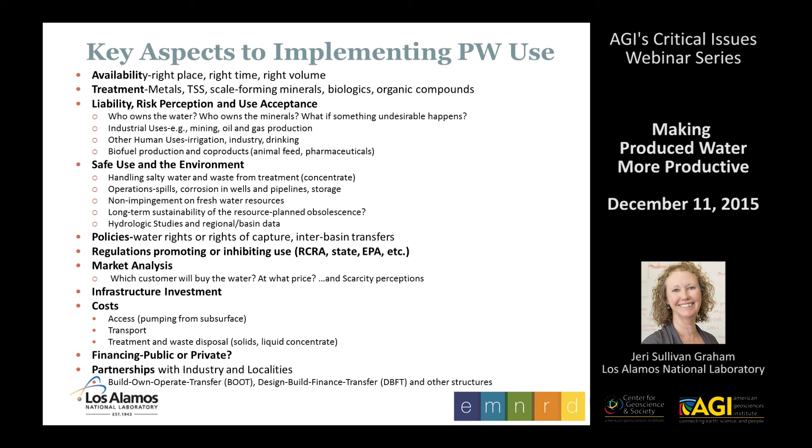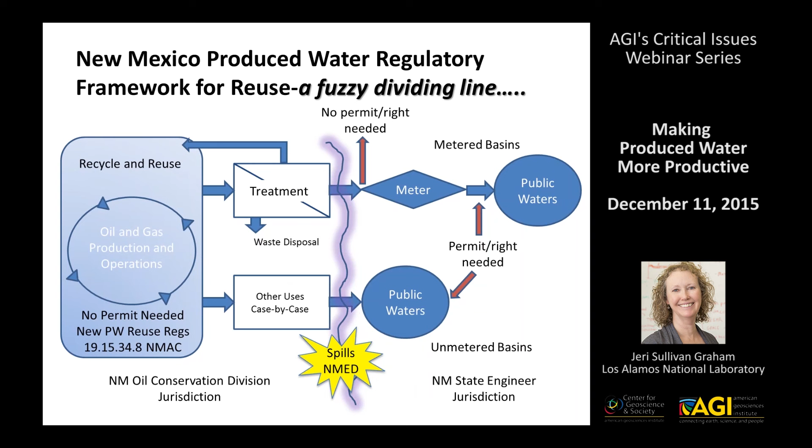However, once we treat this water or move it over into the freshwater regime, which is governed by our state engineer, then we start looking at a completely different regulatory system. We have water rights and water permits that are important. And of course, if there's a spill, our environment department takes over and has jurisdiction there. And again, the liability issue comes into question. So there's a lot of things along that fuzzy dividing line down the middle that will need to be looked at and better defined so that we can use these waters.

Some alternative uses for produced water. As I mentioned, reuse in oil and gas production is a really logical place for produced water to be used. There's a clear regulatory pathway. Hydraulic fracturing is reusing produced water quite a bit right now. And there's also some other examples. I'll bring up one about steam flooding that's being done in California and some of the oil fields there.

Irrigation is one that's always brought up. I hear this all the time. After treatment or dilution, irrigation is a potential use for produced water. I will show an example of rangeland rehabilitation, some work that was done at Los Alamos and Sandia with some small businesses several years ago in northern New Mexico. And then, of course, the most recent study on growing a non-food crop, which is cotton. Algal biofuel production is something we've looked at as well. This is an interesting and somewhat new way to look at using produced water. It's like a new energy versus old energy.

And then another example might be potash mining. This has been proposed but is not yet enacted in New Mexico. However, I'll note that solution mining using saline water is a very good way to extract potash. Right now they're using brackish water. The alternative would be that they would use fresh water with added salt. And so we prefer that they use water that's already salty rather than taking up fresh water. So it's a potential good use of produced water if we can get the quality issues resolved.

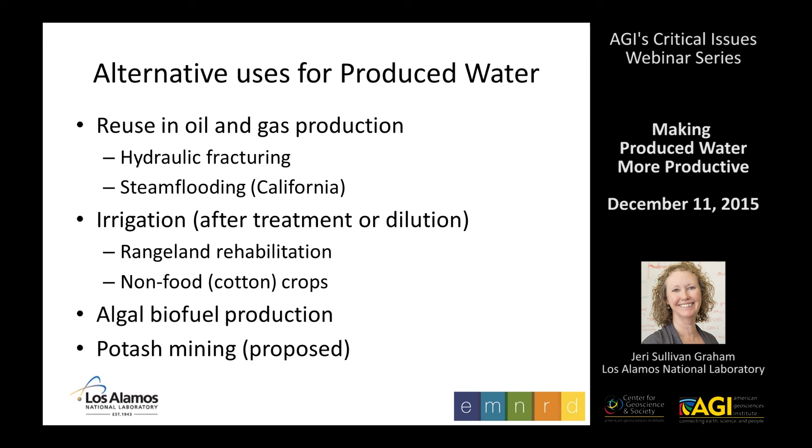For hydraulic fracturing, there are a number of reuse criteria that are important. They may not always be what you think would be important. Of course, some of the critical treatments would include removal of solids, total suspended solids, free and colloidal oil. Microbe removal is very important. Uncontrolled microbial growth in wells can cause corrosion and clogging and other problems. Iron and floc formers is very important. Need to get the iron out.

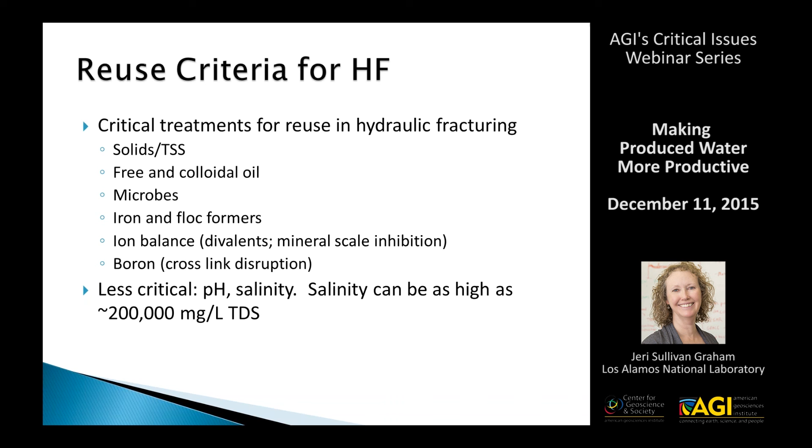Ion balance is also important both for formation interactions and mineral scale inhibition. And then boron is a problem for the additives they use during fracturing. Less critical is pH and salinity. Hydraulic fracturing processes now can utilize very high salinities, which is a good thing because salt removal is very expensive.

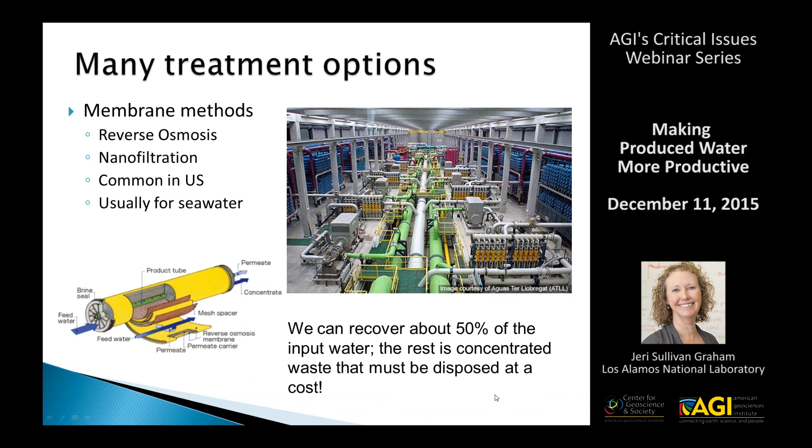There's a number of treatment options that are out there for saline waters. I won't get into this a whole lot, but bear in mind that membrane methods are usually the most common methods we know of. They are usually used for seawater. That's the type of desalination that we know the best. Always bear in mind that there is a concentrated waste that must be disposed at a cost when you do a separations process like a membrane method or a thermal method. You will have some fresher water, but you also will have a waste. And so when you're inland, that means injection for disposal or perhaps evaporation ponds.

Thermal methods are starting to be used more frequently. This is just a fancy way of boiling water, essentially, making sure that we control the heat and the thermal processes. Solar thermal is something that's also a potential new way for separating fresh water from saline water, and it is being used for produced water. Again, you also have a concentrated waste that you're going to need to dispose ultimately.

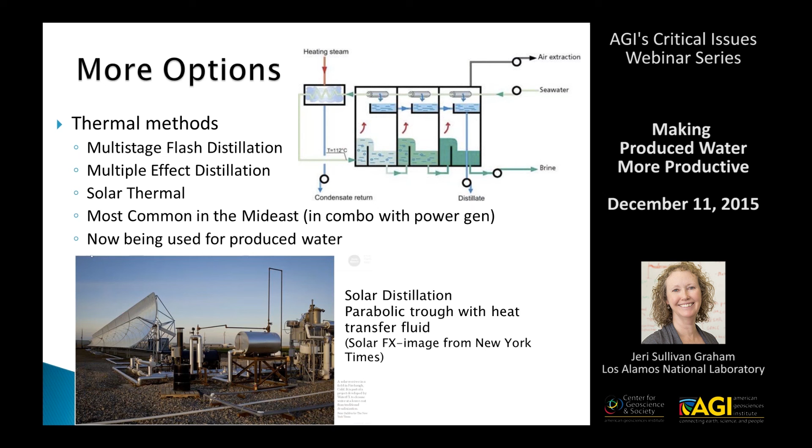And then there are some hybrid methods, membrane distillation and low temperature thermal distillation. Some of these have some improving cost profiles, which is a good thing. Also electrocoagulation and capacitive deionization are possibilities. However, they're most useful for specific constituents or lower salinities. And I could answer some more questions about these methods, but we'll keep moving along.

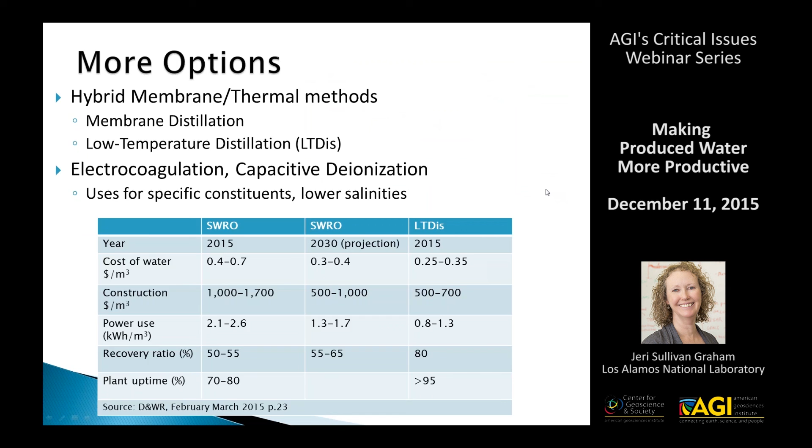I want to thank Kent Adams from Bobco. They recently did a study where they looked at the costs of freshwater consumption versus produced water consumption, both with treatment and without treatment, for a frac job. Their goal was to retain 100% of the produced water and retain the efficiency of their cross-linked gel so they could extract more gas. Fresh water has a cost, and in this case, they did not need to utilize fresh water, so that eliminated that cost of $250,000.

They decided to try some treatment. Electrocoagulation was more expensive. They also did some just basic filtration, which was less expensive. Water transport costs were where the biggest cost was incurred, as well as pumping. So those are not necessarily something you think of immediately as a key for cost, but when you look at the final bottom line, the costs are not that different, and so reuse without treatment and without using fresh water is a very feasible option.

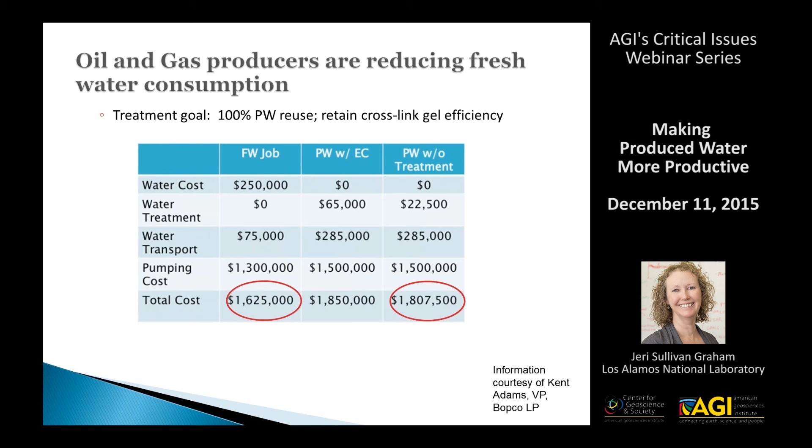Steam generation and aquifer recharge is done right now in San Ardo field in California. This is a heavy oil field. They are using reverse osmosis treatment to create water that is both discharged to basins for aquifer recharge and then for a steam generator, which has very high quality requirements. They're getting 75% recovery while reducing total dissolved solids and boron.

They have a fairly complex process with oil removal, softening, filtration, and RO. So ultimately, they're able to retrieve 50,000 barrels per day of treated water for discharge. And I've got the reference here if you're interested in looking this up. Veolia is the company that's doing the work.

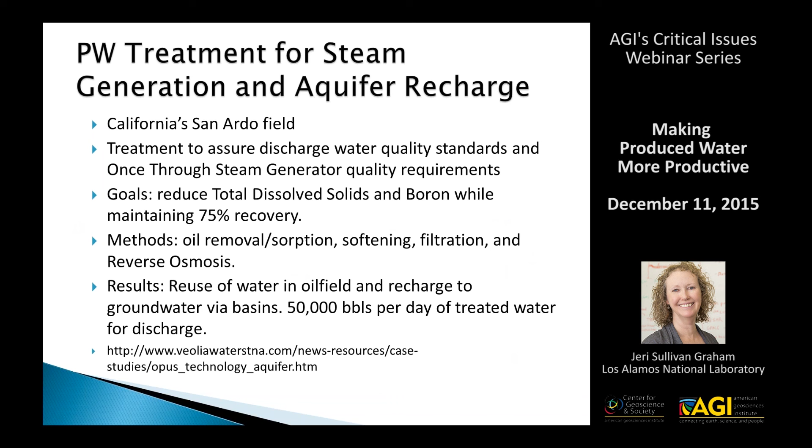The rangeland rehabilitation was work we did in Bloomfield, New Mexico. We had a coal bed methane water, not that salty. We did a number of steps. Used a modified zeolite to remove coal fines and organics, and also reduced turbidity and total iron. And this was a collaborative effort between ConocoPhillips and some small businesses, and was very successful. We had a temporary permit for rangeland rehabilitation up here.

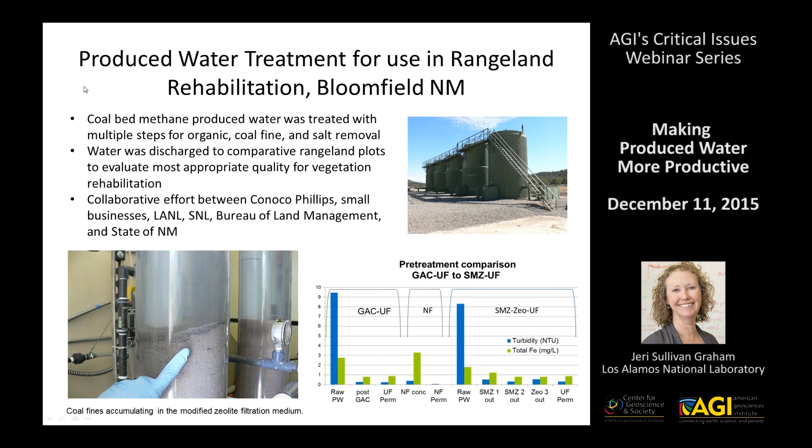Cotton production was done using produced water. Katie Lewis is the researcher at Texas AgriLife. Just finished their study, I think, at the end of November. And they used a blended water, well water and produced water. Interestingly, the treated produced water was much lower in salinity than the well water that they used at the site. The treated produced water was actually an improvement on the water quality. It reduced the salinity, and they had improved growth with blended water. So a very interesting study.

Finally, the algal biofuels. We took a look at where water needs would be for cultivation of algae. Algae for biofuels is going to need a lot of water. Fortunately, it doesn't need fresh water. So we looked at where there is very high evaporation, along with the needs for the algal biofuels. We also looked at where the oil and gas producing areas are in the gray. So the water needs are highest, of course, where the red is.

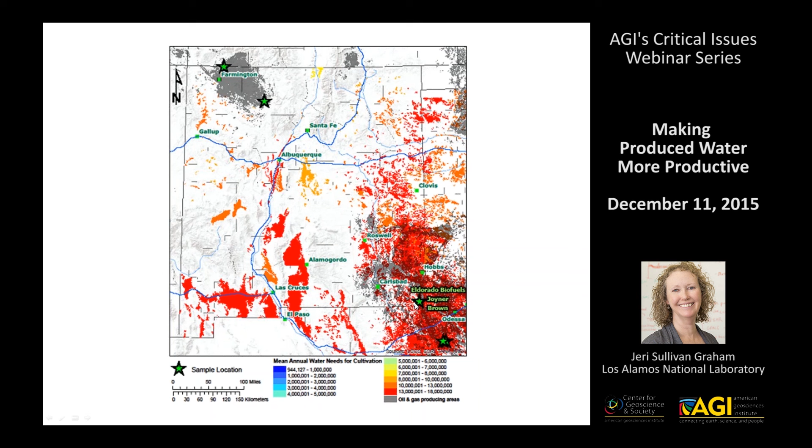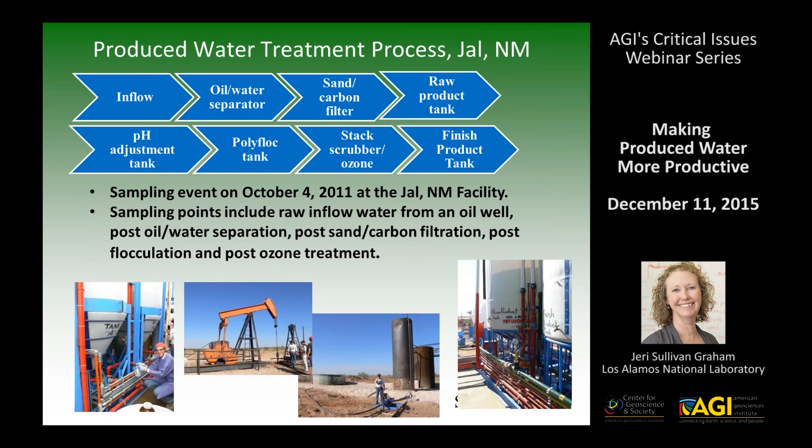We took a number of samples from different wells in different parts of the state. Ended up doing some work down in the southeast corner with the folks at Eldorado Biofuels. And what we found is that we could take produced water, we could treat it using a multi-step process. This did not need to have salt removal, but we did some organics removal and reduction using filters, oil water separator, and stack scrubbing. And ultimately, we were able to use produced water for both lab pilot and also some field scale tests, and we had good recovery of algae and biofuel.

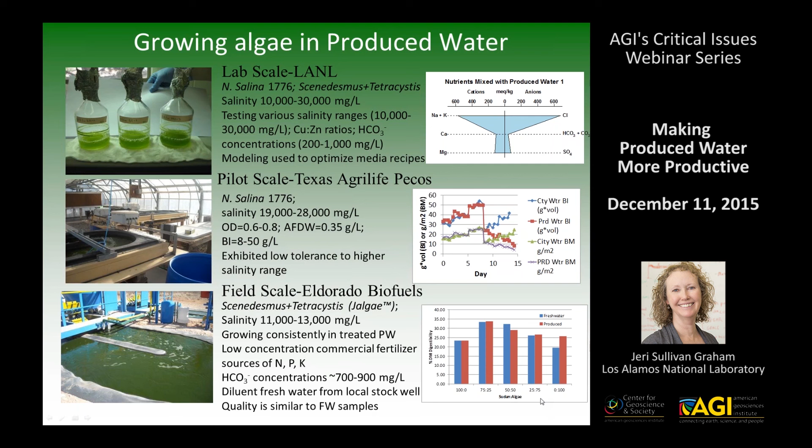We did find that high salinity tended to reduce our growth, and we also got very good quality when we started looking at additional uses of the algae for stock feed, for example. So the algae grown in produced water was just as good as algae grown in fresh water once we harvested it and took a look at it. So a lot of possibility there.